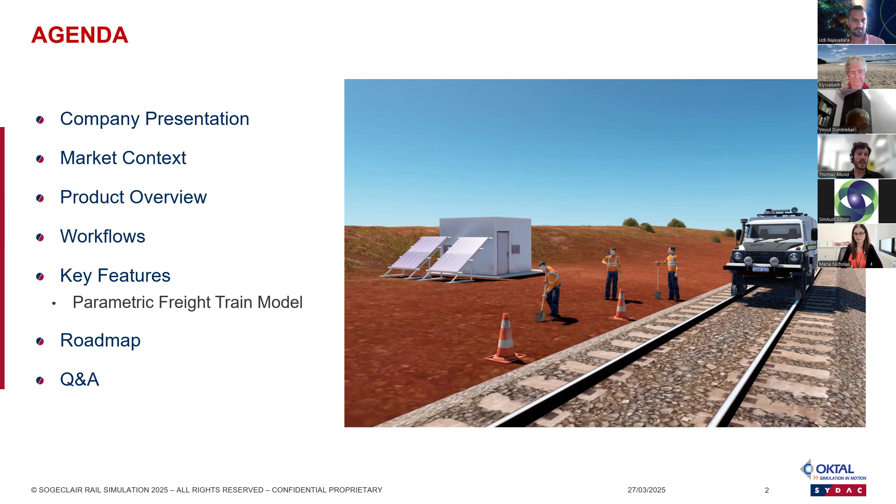Just giving you a little background as to why we got into making this simulator product, giving you an overview of what it's made of, how it works, the sort of flows that we have designed for our customers, key features, and delving just a tiny bit deeper into the train model itself, because that's really the centerpiece of this simulation product. And then the sort of features that we would like to be developing in the future as part of our roadmap.

So first of all, who are we? Well, as Udi said, I joined this company 7 years ago, almost eight now, coming from Belgium, just seeing what Australia had as opportunities for young engineers like me. And then over the years, we merged with this French company called Oktal that essentially does the same thing as we had been doing. And it was part of a bigger group called Sogeclair.

The core of our business is really to deliver simulators, a bit like flight sims, but for the rail and road industry. So anything that's heavy, has some safety aspect and requires some training on computers before you jump into the real machine. We've delivered to customers like BHP, Transport for New South Wales, Transport for Melbourne, but also SATA, TAFE for truck simulators, and also customers all over the world. We've got an office in India and in France, in the south of France, Toulouse as well.

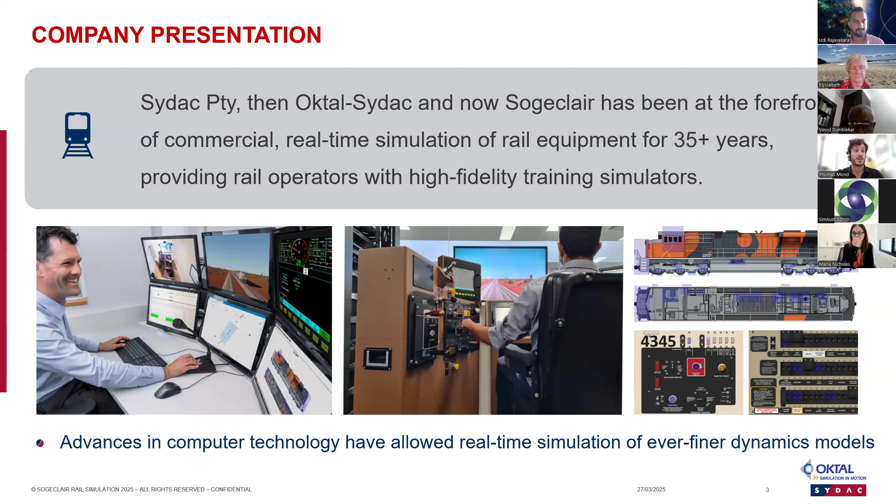So over the years, we developed quite a background knowledge into railway systems and have been able to refine our models to simulate more and more accurate and refined dynamics of the train, and this has led us to get into this not so much training simulator, but simulator more designed for engineering purposes. We'll get into that.

So what we observed in the market is that freight operators, for example the big mining companies here in Australia, but also in the United States and South America, Canada, first of all, have similar systems. They have trains that are all standardized by the Association of American Railroads, and they're constantly looking for ways to improve their operations, right? Time is money. The goods that they transport with their trains are very valuable, and the more they can ship, the more returns they make.

So that's one thing. They also want to be able to reduce the amount of wear that can happen in their system. They're subject to pretty harsh conditions, and as you may know, these trains are huge, many kilometers long, carrying hundreds and thousands of tons of goods. What is especially a focus for them is coupler breakage issues with the coupling between the different cars.

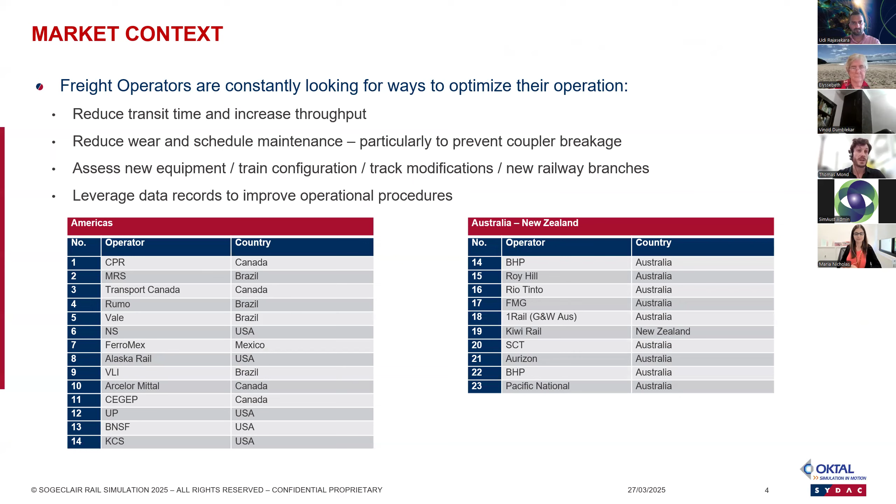So this has led us to design this product, which we call SimAlytics, for simulation analytics, which is really a tool designed to help operators optimize their processes. How do they do this? Well, they want to be able to simulate scenarios. What if I try a different kind of locomotive? What if I use a second power point in the middle of my train?

So not just having locomotives at the front of the train, but also in the middle or at the back of the train. And they also want to be able to rerun real life scenarios through simulation and have a finer view as to what actually happened in the train. Did I damage my coupler? Did my driver get an emergency braking that might have damaged my train?

So we ended up listing features that would be useful for this sort of analysis. And we came up with a model that we had already built over the years for training simulation purposes, that we made as parametric as possible for operators to try different systems, a track builder to allow them to draw and simulate their railway track,

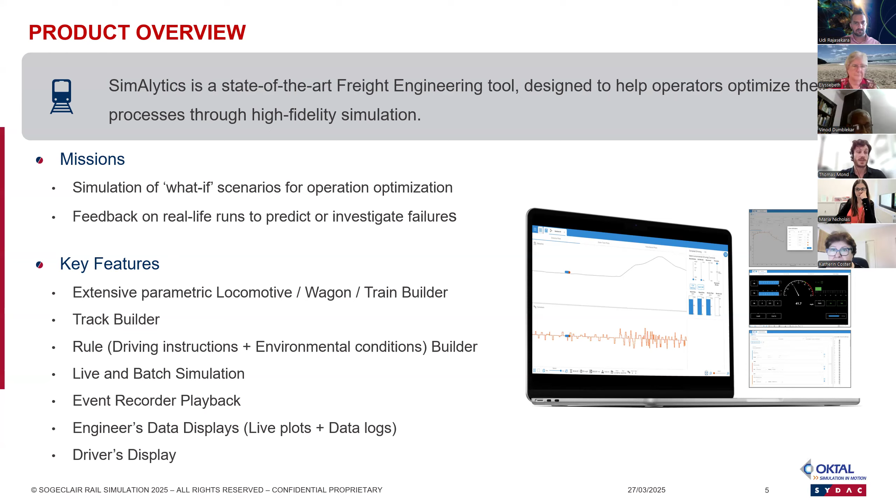So just delving a little bit deeper into the different workflows. We've got the workflow that was designed for simulation of what-if scenarios. It's essentially building your track, building your train with the type of parameters that you have on the real system, running the analysis and building the train that you want to simulate and running the simulation.

Whereas if you want to investigate a real life run, then you would be importing data from what is called an event recorder, which is essentially a black box located on the real train that records a bunch of parameters: how the driver drove the train, did they get an emergency, what the pressure in the brake pipe was, for example, and so on.

And we rerun that as part of the simulation in order to allow our customers and users to analyze what exactly happened during that run with the level of fidelity that our dynamic simulators provide.

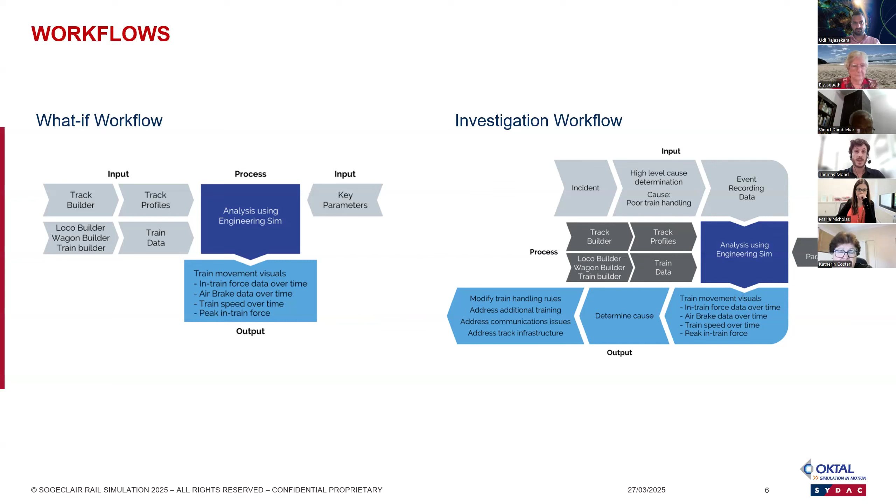What does that look like in practice? So there was a big effort in trying to identify key parameters in the train system, how to be able to configure your system, your locomotives and wagons as close as possible to the system that you actually own as an operator.

So this was identifying what sort of brake valves were used on these sorts of trains, because again, they're specified as per American standards. Same for draft gear couplers, being able to define the amount of slack that you may experience in your couplers, because that's really important in the calculation of the forces experienced in those couplers. Fuel capacity of the wagon, and so on.

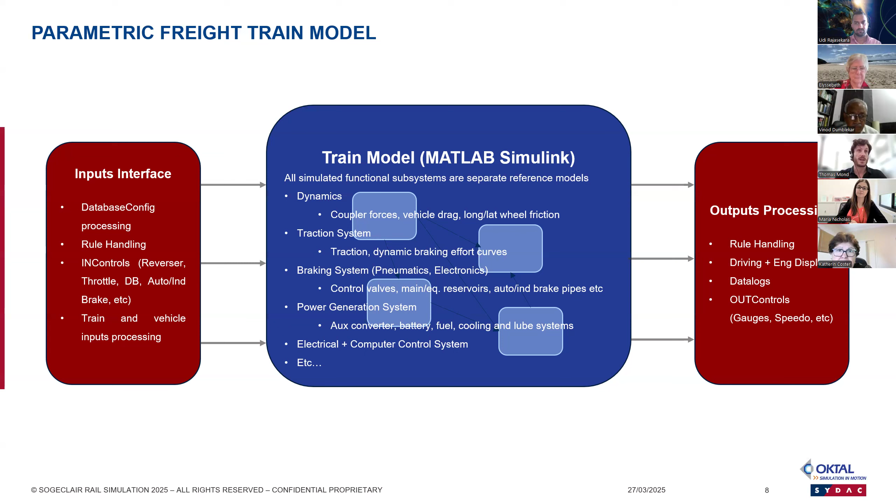Output processing, so that's essentially providing all of the meaningful engineering data that you need to perform your dynamics analysis on your system, as output, either logged into what you could read as spreadsheets, or to display on graphs that can be observed in the simulator directly. I'll get into that in a minute.

And also a tool that was really important in the industry for a while was the New York Air Brake TDS simulators. It's a company that we've essentially been refurbishing a bunch of simulators for, and it was sold to many freight operators in the United States because NYAB, New York Air Brake, is an American company.

So it was important for us to be able to inject that data straight away into the track builder in order to automatically generate their track based on that if they already had created their track for those simulators. So we had some kind of back compatibility for these old simulators.

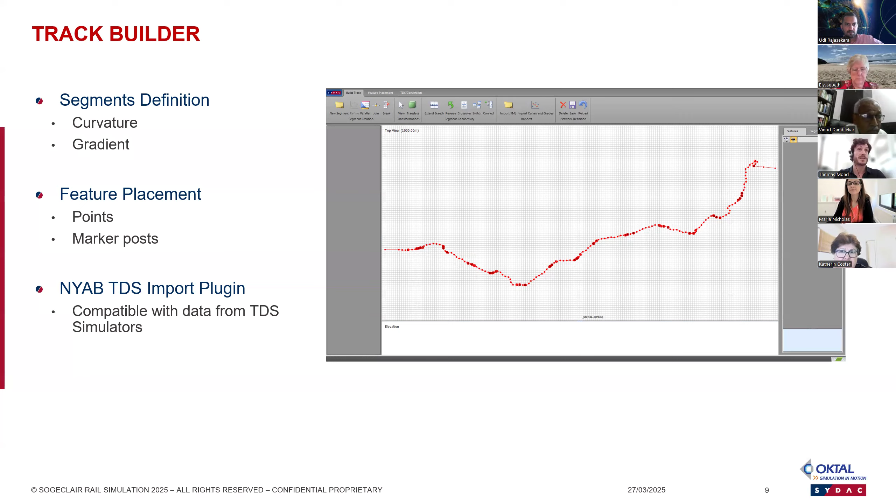Went too fast. Rule editor. So as I mentioned, one thing that is quite common to old school operation is just to have a good old notebook in your train as a driver that essentially tells you how to best operate your train. So if it's fully loaded or empty, it's going to have instructions such as once you pass that crest at milepost X, start applying brakes in notch, who knows, 6 or whatever, to start slowing down the

train, because obviously these trains are massive and heavy, and if you start taking down the slope too fast, well, they're basically unstoppable. So this sort of driving instruction really provides you with a clear view as to how you're supposed to be driving your train as an experienced or new driver.

We wanted to be able to vary the environmental conditions as well, change the track adhesion based on whether we're simulating a wheel-track interface in Canada, for example, on a freezing day, or on a very hot day here in the Pilbara region, for example.

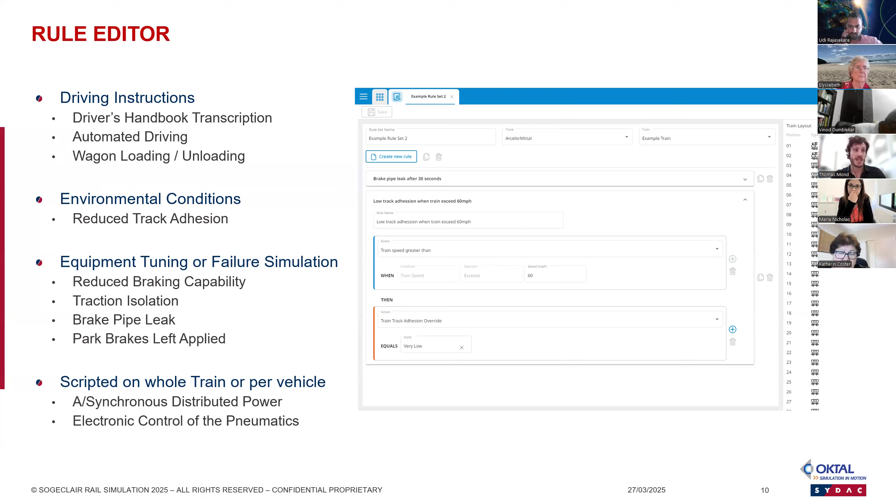Data logging, so I've touched on that. It's essentially saying, well, this is the place where you instrument your simulated train. You set a bunch of simulated sensors on your train, and you say, I want to record the vehicle accelerations. I want to record the coupler forces, buff and draft, on these and those vehicles, be they locomotives or wagons.

And you can also provide some aggregators, because you want to just focus on what is the absolute peak value that the coupler force has reached, which may trigger breakage at that particular point in the train.

Adjustable logging rate as well, as to how fast you want those sensors to be behaving, and all of this gets output into essentially a CSV file, which can be opened with Excel, and you see things like where those parameters were recorded, at what time, what location, etc. Hope all of this makes sense.

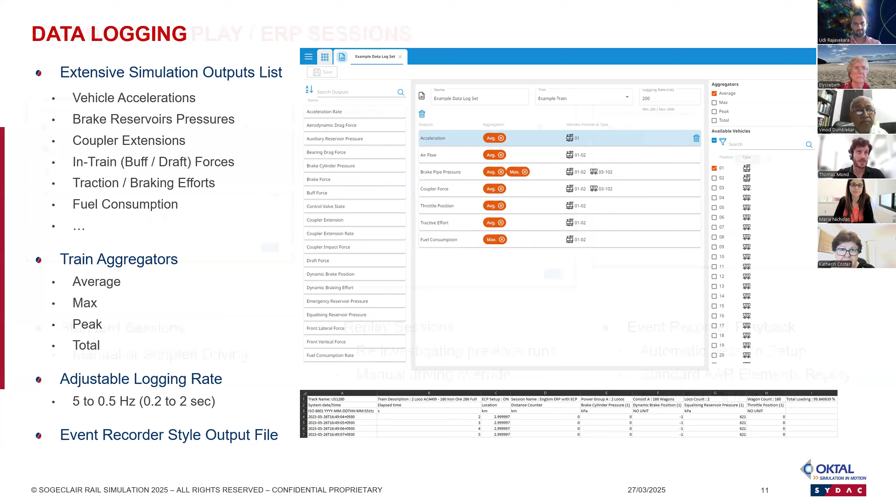The different types of simulated sessions that you are able to simulate with the simulator, where the standard session is essentially a live session, a session where you can drive your train manually or using the driving instructions that we talked about, where you replicate your driver handbook, and the train is going to be automatically driven following those rules.

Replay sessions, essentially just replaying a session that has already happened, and then the very important event recorder session. In this case, the train is not driven as per your manual instructions, be they entered as part of the rule editor or just manually during the session, but it's all extracted from a file of data recorded on the train itself through those event recorders, these black boxes that I was talking about earlier. So essentially you load up all of your data, and the train is going to be rerun in the same fashion as it was driven on that very day.

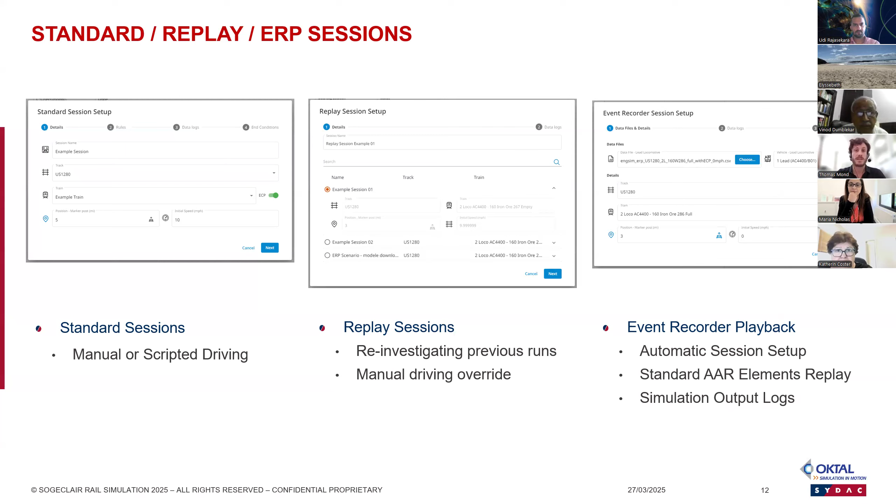Live and batch simulation: why it was important for us to do batch simulation as well, especially for the event recorder session, where you get a bunch of records of what has been happening on your train, say over the course of a week. You might want to rerun that in simulation over the weekend or overnight to see what has happened.

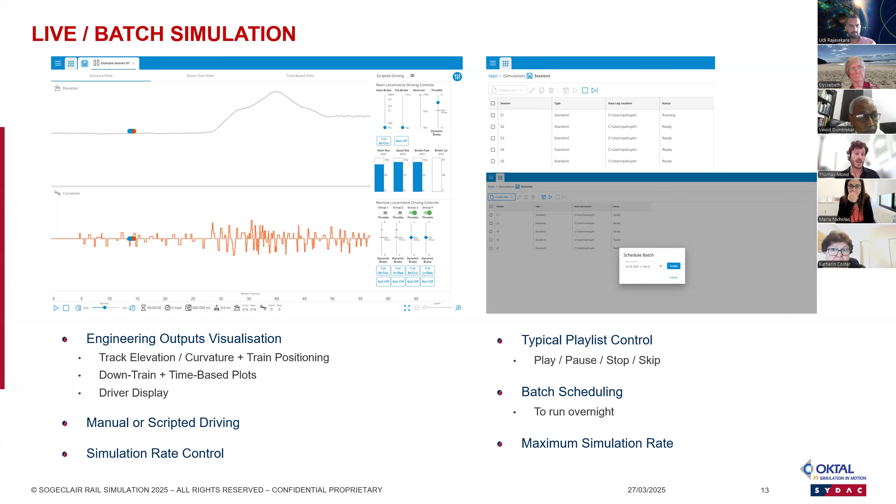And this feature allows you to essentially create what you could consider a playlist of these different sessions that we just talked about, and say run this overnight or on that day, and I will come back on Monday and analyze all of the information that came out of it, in order for me to optimize my procedures, give feedback to my drivers, see if I want to make this or that change in my operational procedures.

The driving displays, or engineering display that I was talking about earlier, are essentially a reproduction of what a driver would typically see on their computer screens in the train, that allows you to drive the train in simulation, see how fast you're going, what the pressure in your reservoirs is, if you're cut in or cut out to the brake pipe, things like that.

And then on the other side, we've got the engineering display that essentially uses all of the data that we have instrumented on our train, all of the simulation outputs, and plots them in ways that make sense, either along the length of the train. So we've got the down-the-train plots, we call them, that show you the value of the different parameters for each vehicle, or you can record them over time with some special aggregators, peak, max value, etc.

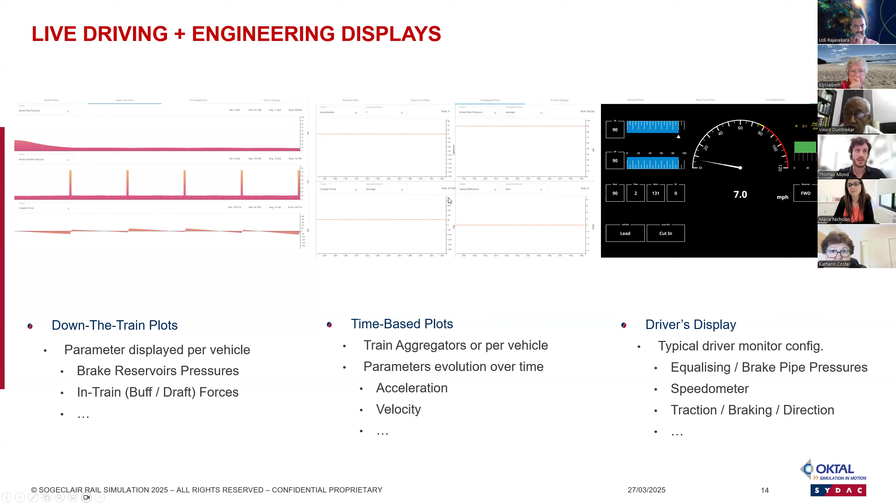So where do we want to take this product in the future? Well, we're still probing the market and getting information from our different customers. There's obviously a big focus on transitioning the industry towards newer, cleaner technologies. I was talking about diesel generators earlier, where we see a shift starting to happen, at least at the research level, to look for cleaner sources of energy generation. Things like fuel cell vehicles or battery powered vehicles, essentially a big wagon, which is a huge battery powering an electric locomotive.

We would like to look at features and functionalities that allow you to finely tune your speed control in areas where, for example, you'd be loading your train and you would have a change in the loading profile of your train. Provide tools: the live engineering displays are for the live session to see what's happening on your train, and then you get the spreadsheet.

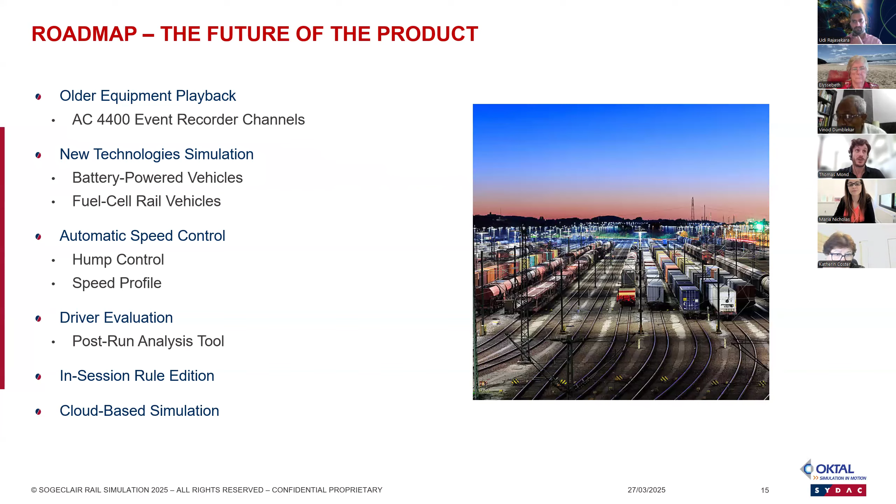We would like to also provide tools that allow you to reload all of the data that was extracted from the train and do analysis straight in the simulator, and instead of just doing your rule editing and scripting before the session, also be able to finely tune these things during the session. So these are all features that we would like to implement in the future for this product. And that's probably our presentation for SimAlytics.

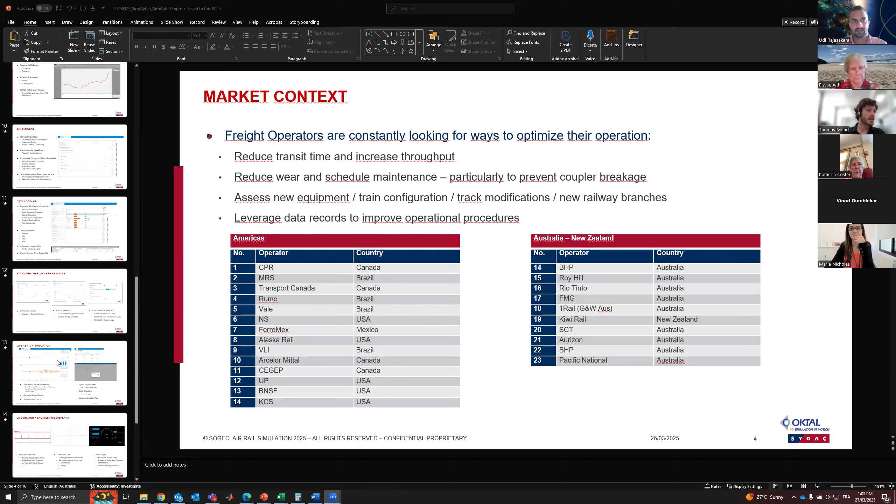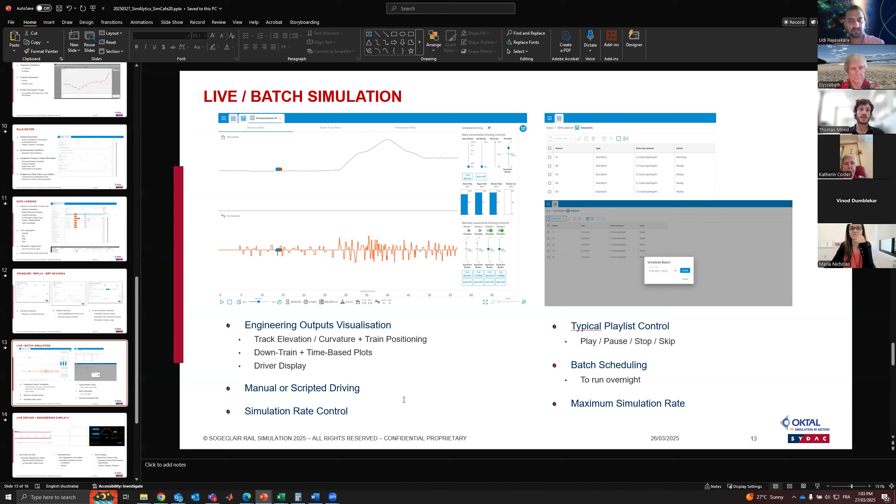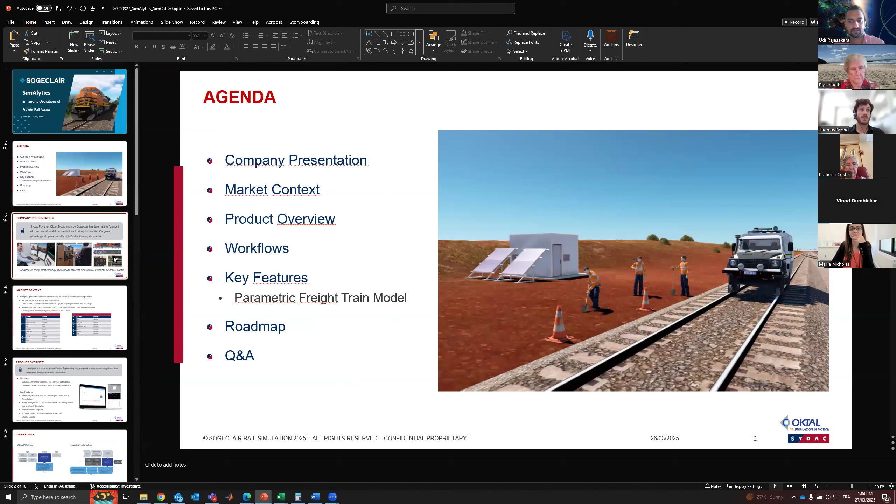Elyzabeth, any questions? We've got a question from Katherin. When a driver is operating via the software, is she actually seeing a visual of the rail line? No, there's no simulation of vision in this case. So essentially what they're going to see is where they are on the track, and they can operate this. At least that's for the default software. For our training products, we definitely have vision simulation as well. So you will have visuals like these ones of where you are on the track and what's happening. This is actually a picture of a training simulator that we have where you see there's a vision screen.

How do they make the connection with the act of driving? So they have feedback of where the train is located. They have visuals of what speed they're going, exactly what's going on. But the idea with these simulators is really mostly not so much for live driving of the train. It's mostly for simulation of batches. You want to be able to try different driving strategies that you build with your rule editor, and simulate many of those in order to see which one is going to give you the best output. Does that make sense?

Yeah, can you hear me? Sorry, my computer is playing up terribly, so I've had to switch to the phone.

So thanks, that makes a lot of sense. I guess what was happening for me was that I was thinking about that sense of when you're driving a car or anything else, you've got a physical sense of movement, of actually doing the actions. But if this isn't primarily for driver training, but more for analysis, that helps me understand where it fits. Yeah, the product is very much tailored for analysis. It's more of an engineering tool than a driving tool.

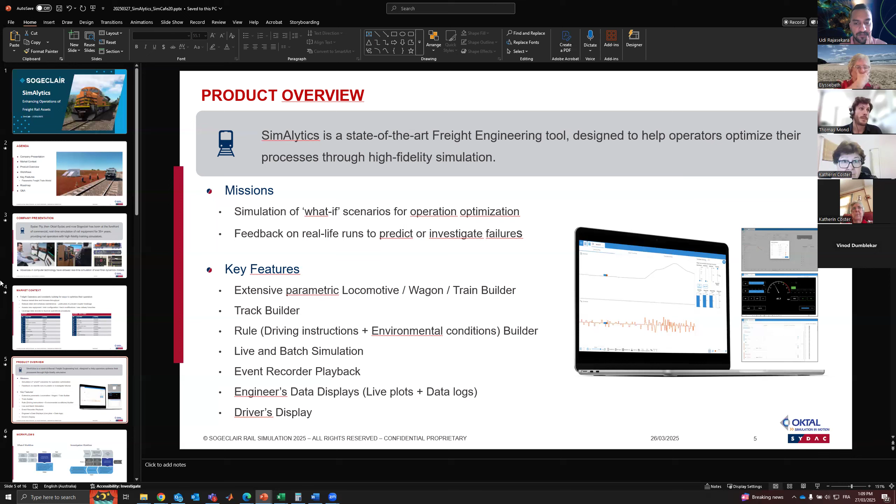Yeah, just to expand on that. Sorry, go ahead. So what I'm hearing is it's profit maximization, it's asset maintenance, and also safety is the key. Exactly. And also engineering studies and driving strategy. So there are a couple of simulators that we do. We do freight train driver training simulators. That's one of the images that you saw. That's separate to this SimAlytics tool.

So the image which you see in the middle and the image which you see on the left is the driver training simulation aspect. That is not SimAlytics. But SimAlytics is more of an engineering analysis to set up driving strategies and to also analyze, all right, if my driving strategy is such and such, what is the impact on the couplers, what is the impact on the wheels, what is the impact if I brake too early, where would I stop? If I go at this speed and if I start braking, where would I stop?

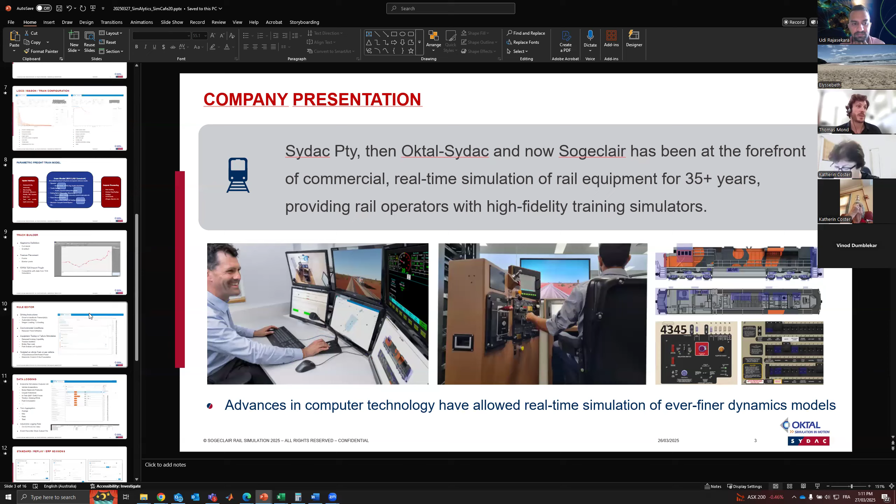And that informs the track design, the engineering decisions, the maintenance scheduling, which this tool actually provides that analysis. Yeah. And these are tailored to different fleets. So the whole idea behind the parameterization of the model itself is precisely to tailor to your own fleet.

So I think by default, we provide presets of, I can't tell you off the top of my head, at least 3 or 4 locomotives and maybe 7 or 8 different types of wagons, but you can essentially build however many you want, based on the parameters that are described here. But there's a bit more of an extensive list. Does that make sense? It's to tailor to your own fleet.

Yeah. All right. Vinod had some questions, but I'm not sure if he's still on the line because he had to go away to make a call. But it struck me that his questions were kind of more along the line of what I was thinking, that it is an instruction, whereas it's actually what Catherine said, cost benefit analysis and so on.

Yeah, so we know it's definitely not a gaming simulation. There's not really a competition aspect, and there's no catering for what we would call integrated session, where you would have multiple users driving trains at the same time. We provide this sort of functionality on our driving simulation, but not for this.